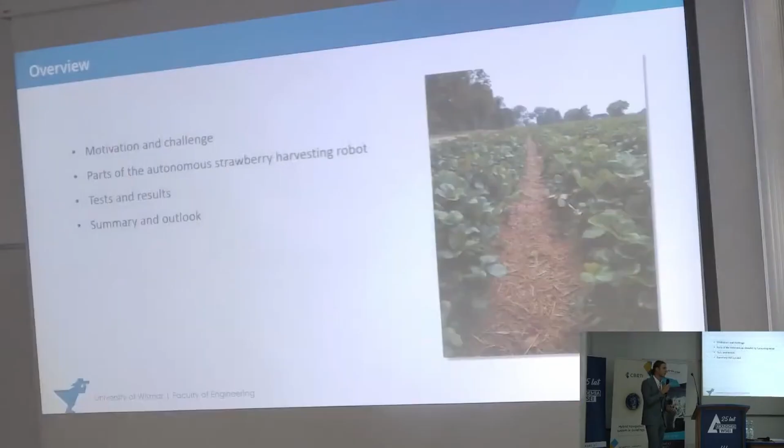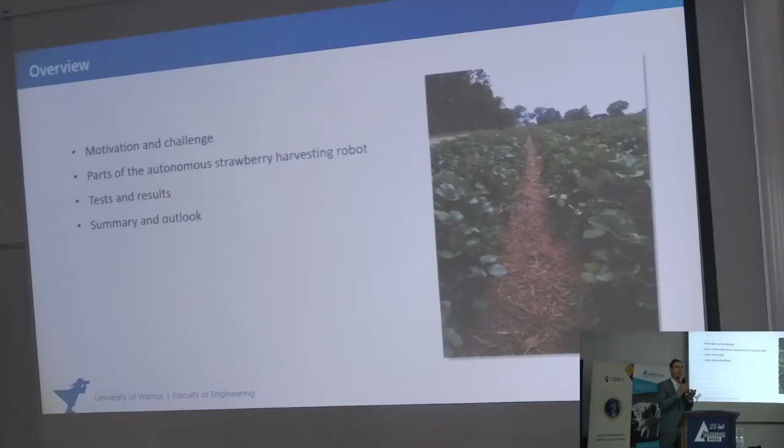So at first I will give you a short overview of my presentation. I will explain the motivation, the conditions, and the difficulties in harvesting strawberries. Then I will explain the different components of an autonomous strawberry harvesting robot which we need. I will show you some tests and results and some small movies, and at the end I will give you a short conclusion and an outlook.

So at first, the motivation. There's an increasing lack of seasonal and skilled laborers, especially in regions with an aging population. Manual harvesting is very costly, especially for fruits and vegetables that require selective picking. You can only harvest strawberries one by one, you can't harvest more than one strawberry at once, so that makes it very costly. And fruits and vegetables must be harvested in a narrow time window to ensure freshness, quality, and shelf life.

And of course, there's a growing demand for increasing efficiency and sustainability in agriculture, especially because of growing global food demand as well as climate change and climate conditions. And unlike human labor, robots can work continuously, regardless of time and weather, with some limits, and that increases productivity.

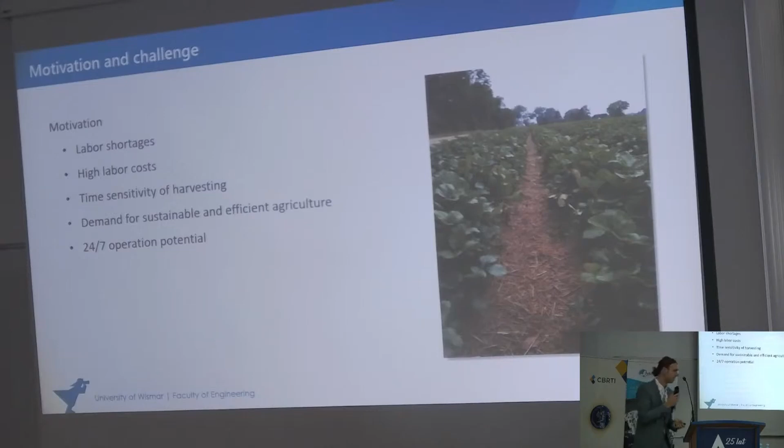But it's not so easy to develop an autonomous strawberry harvesting robot because there are some difficulties. Strawberries are a very special culture, very delicate and sensitive to pressure. Not all ripe strawberries have the same color. For example, because of varying lighting, shadows or sunlight, it's hard to detect the difference between a ripe or unripe strawberry by cameras and sensors. The strawberries can be partially or completely hidden from cameras and sensors by leaves or other strawberries.

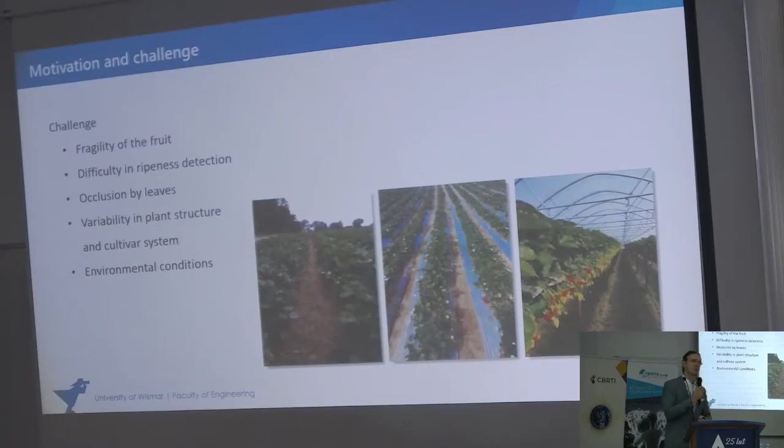And of course, there's a big variation in the type of strawberries and also in the growing system of the strawberries. Here are three pictures showing three different growing systems. The first is strawberries planted at the ground. The second picture shows strawberries planted in raised beds. And the last growing system, the third picture, shows strawberries planted in racks 1 meter above the ground. So that makes it difficult for one robot or autonomous system to harvest strawberries.

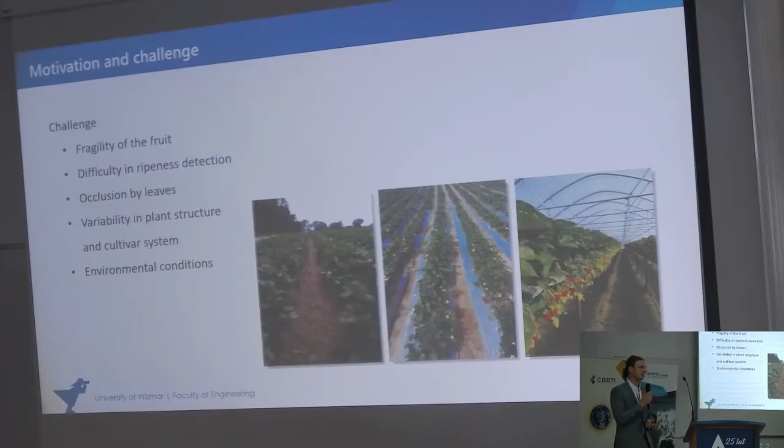And of course, weather, mud, and uneven terrain are also challenges for a field robot. Rain and dust, for example, can impair the cameras and sensors. So it's very difficult to build an autonomous strawberry harvesting robot, but we tried it, and Steffen built a prototype of a strawberry harvesting robot.

Now I would like to show you the different components we need for such a system. The key focus of our realization was to realize it very cheaply. So at first, of course, what we need is a mobile platform. We developed different mobile platforms and different prototypes.

For example, with a 4-wheeled platform or a 3-wheeled platform. We also developed a prototype with a chain drive. So different designs we developed and tested. At the end, for example, for strawberries planted in racks 1 meter above the ground, we used a 3-wheeled mobile platform. At the end, it's only the platform—there isn't any robot on it, but the robot and the robot kinematic will be placed somewhere here.

I will show it later in some short movies. So you have a mobile platform now, and this mobile platform drives safely through the strawberry lanes.

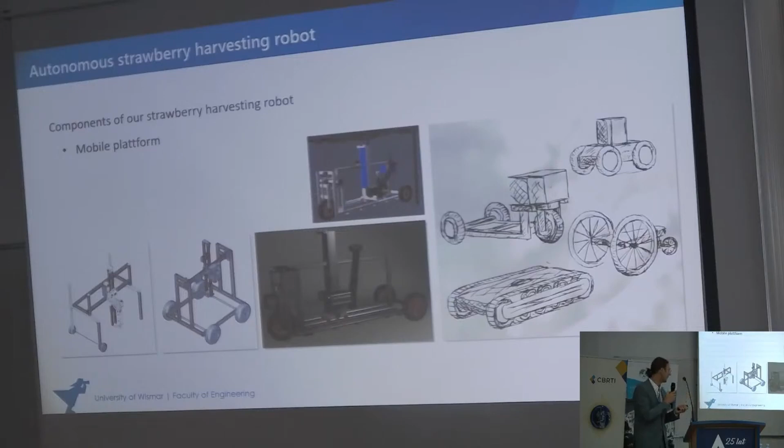And of course, what we need is the robot kinematic. For that we also developed different approaches, different concepts. Here we found that it's better to develop different robot kinematics depending on the growing system of the strawberry—one robot kinematic special for strawberries planted at the ground, and one special for strawberries planted in racks. For example, for strawberries planted in racks, we use the 4-axis robot kinematic shown here.

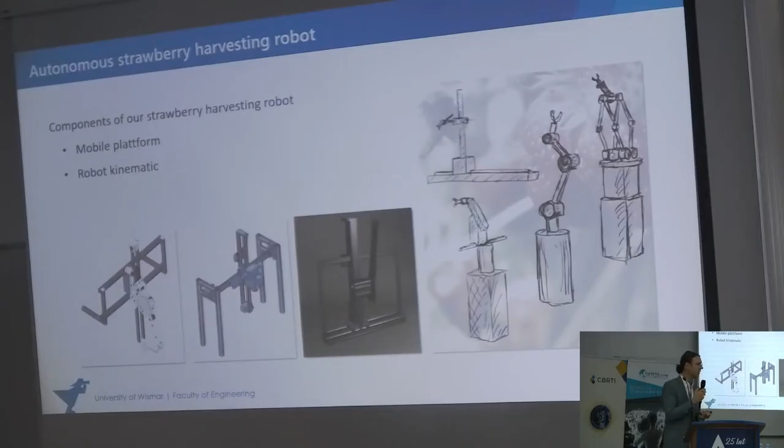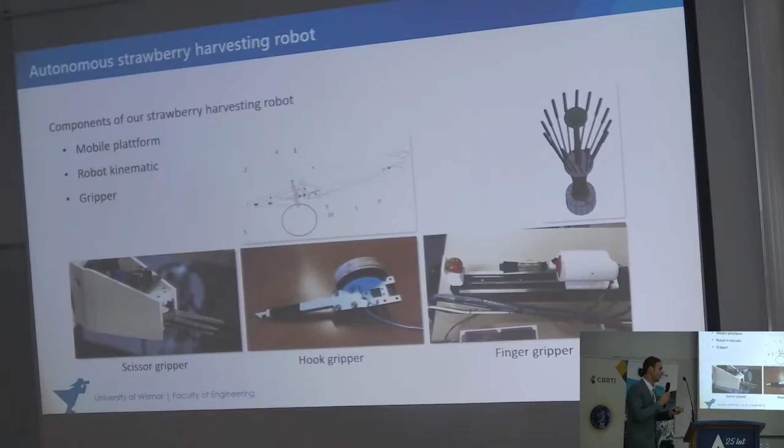So I will show it later in a short movie. That's our grippers. And of course, if you want to have an autonomous strawberry harvesting robot, you need a camera system and image processing. So our scissor gripper, for example, or the other grippers also have a camera system.

For example, here for the scissor gripper, you see the camera. With the camera system, we detect the ripe strawberries. For that, we trained a neural network, and that neural network provides us the ripe strawberries, the unripe strawberries, and also the stems corresponding to the ripe strawberries.

Because the scissor gripper and the hook gripper harvest the strawberry at the stem, we have to detect the stem of the ripe strawberries. The finger gripper is harvesting the strawberry directly. So in this picture you see a special picture for the finger gripper, because it harvests the strawberry from below.

That's why we need a picture from below, not from the side like the scissor and hook gripper. This is a picture from the side of the same strawberries. For example, this strawberry's picture from the side is hidden by this unripe strawberry, but from below you can see it very well, so you can harvest it easily. So that's our camera system and image processing.

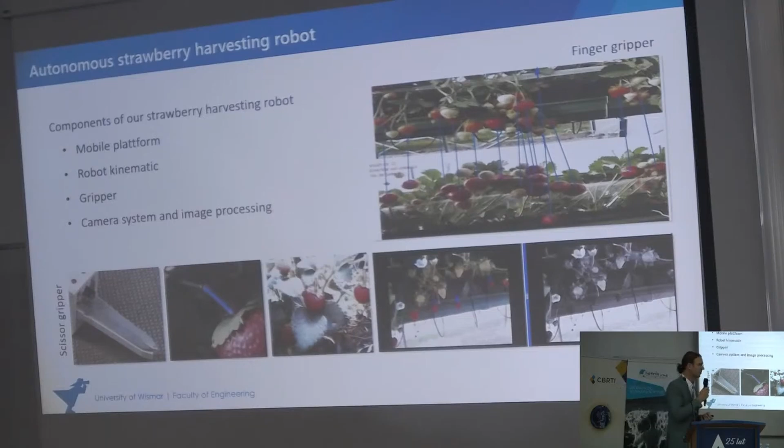And of course, for a robot we need a control system. We developed two control systems, one for the mobile platform and one for the robot, quite similar. We have hardware drivers for the motors and the drive, a controller (the STM32) for the hardware driver, and a small computer for communication and navigation, with a small display for user interface and interaction.

For the robot we use a 4-axis robot, so we need 4 stepper motors with 4 hardware drivers, as well as drivers for the grippers and voltage supplies for the sensors. We also implemented a Raspberry Pi as a small computer for user interface and communication.

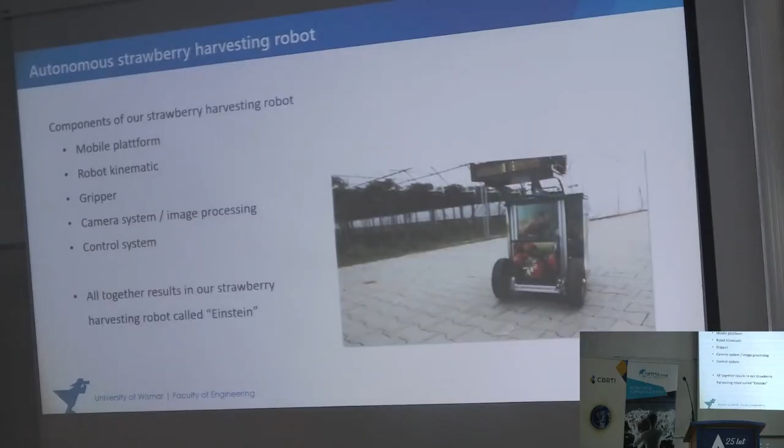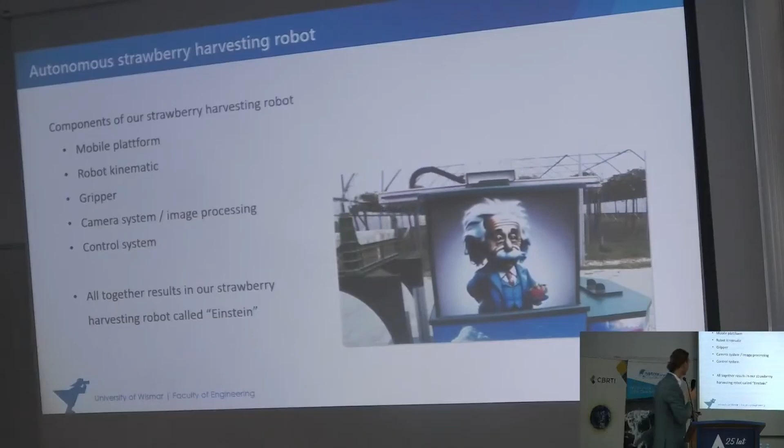The neural network isn't calculated on the Raspberry Pi; it's calculated on a server because it's a little faster. All these components together result in our strawberry harvesting robot, called Einstein — I don't know exactly why, but Steffen and Peter do. This robot moves safely through the strawberry lanes and hopefully harvests some strawberries. I will show you some pictures and results.

Here you see our strawberry test bench, and a special scissor gripper that won't cut the strawberry at the stem because these strawberries are fixed with a magnet to try it again. He makes a picture, the image processing works, and then he harvests the strawberry. This was a very early test — there wasn't a strawberry, but in the next try he got it. So that's just a test bench, just a trial.

And here you see the scissor gripper in real life. The gripper moves directly from the camera position to the stem, and then harvests the strawberry.

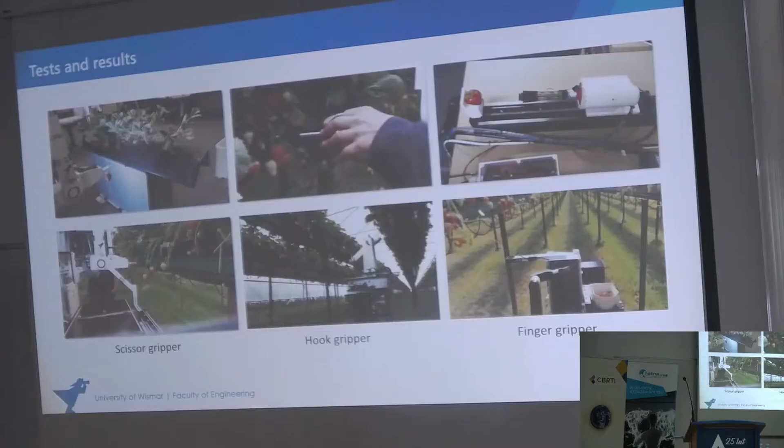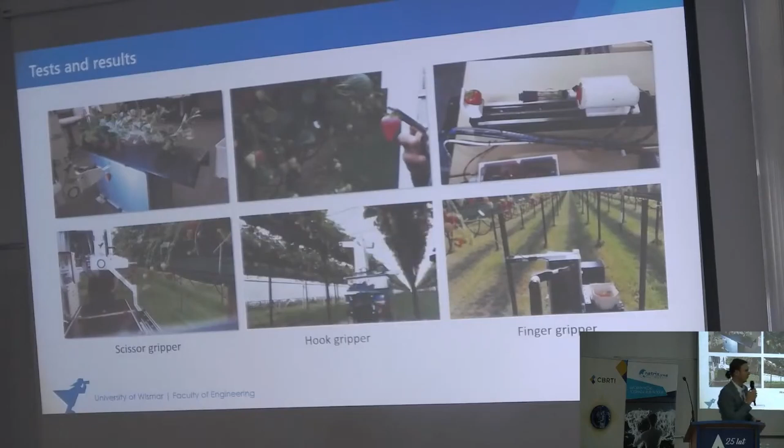Here we see our hook gripper — it's just a manual test. The hook moves backwards, fixes the strawberry at the stem, and then it's cut by the small knife at the hook. And here you see the hook gripper in real life. It's not a great movie because the perspective changes quickly, but at the end you see the hook gripper getting the strawberry, and you can put it into a box, something like that.

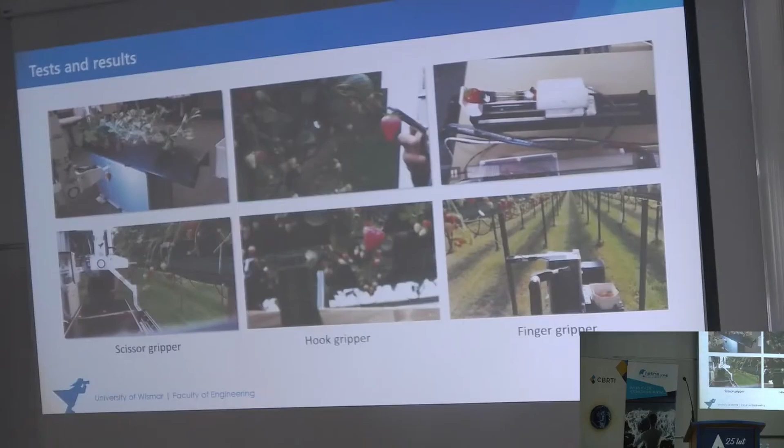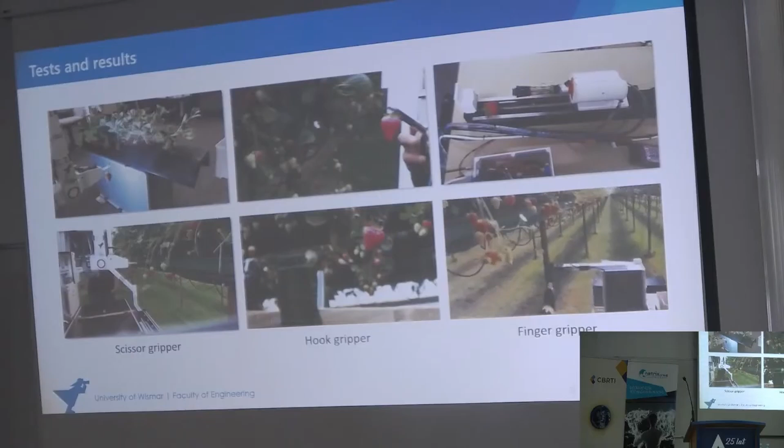And our last gripper — here you see a test bench for our finger gripper. We have a vacuum source that fixes the strawberry, encloses it with fingers, and then rotates, which tears the stem. Here in real life, the strawberry is planted in racks one meter above the ground, and he harvests the strawberry from below.

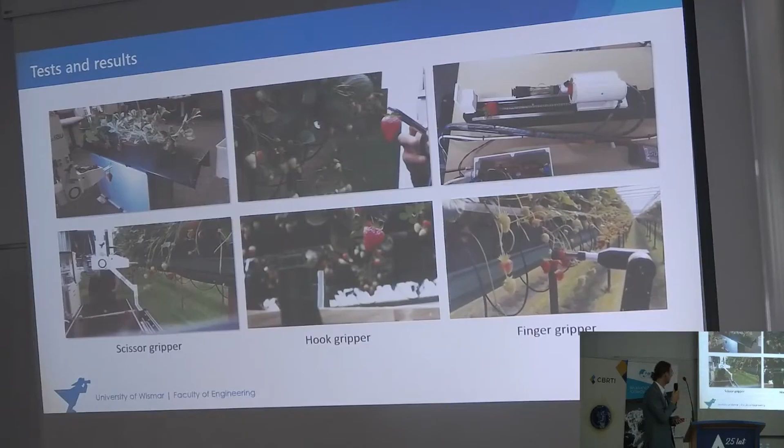Yeah, as I said — those are some results of the work of Steffen Lack. Now I would like to give a short conclusion and an outlook.

In this study, we present our recent developments of an autonomous strawberry harvesting system. Our results demonstrate that autonomous systems can be effectively applied to complex processes, and strawberry harvesting is a very complex process. We found, especially in cooperation with strawberry farmers, that cost is the deciding factor for such a system — it must be cheap for the farmers. Of course, you can use an industrial robot to harvest strawberries, but it's very expensive. That's why we developed a tailored robotic kinematic specifically for strawberries.

We also used cost-efficient, standardized components like aluminum profiles, HPL plates, or 3D prints. This makes it a little cheaper than using an industrial robot.

For the outlook, of course we can increase efficiency through improved image processing and motion planning. It would also be nice to adapt our existing concepts to other application areas, for example harvesting tomatoes or peppers or something like that.